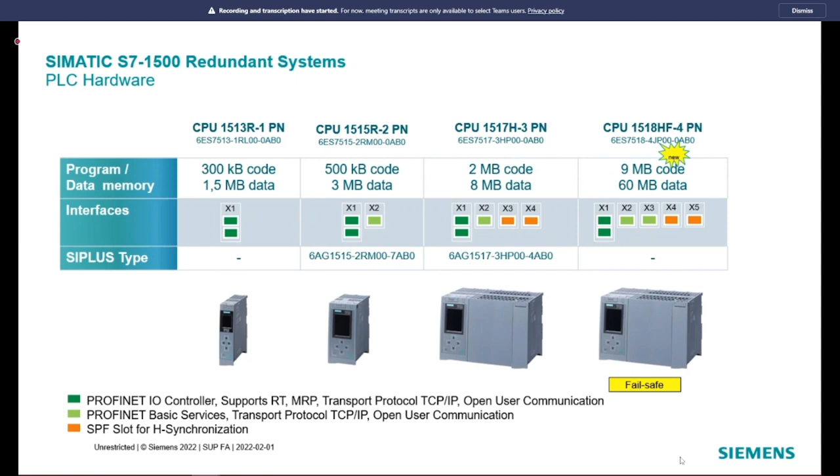So as many times we have already mentioned, this is the new CPU with the failsafe system. Previously, until version 16, there was no safety system available for 1500 R/H, but from 17 onwards with the 1518 HF CPU, we can have the failsafe system, and the memories are 9 MB code memory and 60 MB.

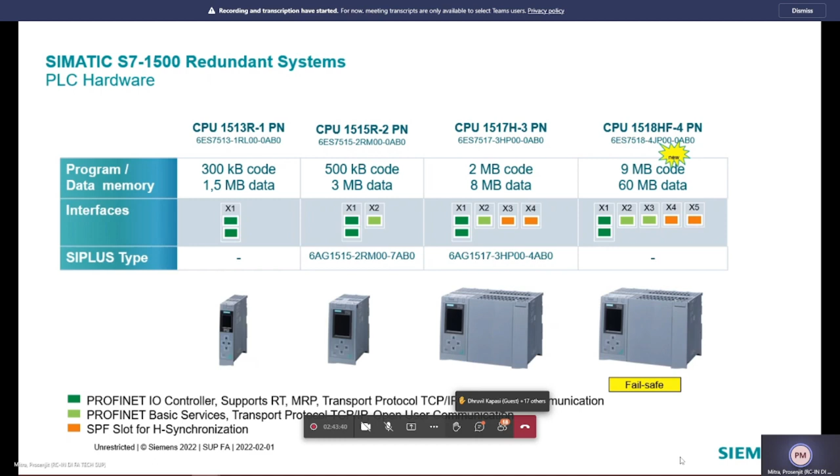Now coming to the system redundancy and the different network configurations. This is very important because during the checking of your configuration, you can keep all these things in mind, and this will help you to configure the final architecture.

So just to show you, ET 200SP and MP are there by default, but as you know, there are different shortages of material going on. You can also try with maybe ET 200eco PN, because this is also supported from firmware 1.1. And there are PN couplers which support S2 devices. These are basically the list of S2 devices supported with 1500 R and H. Apart from that, ET 200SP HA is also supported. I will show you in more depth what can be done with SP HA in the upcoming slides.

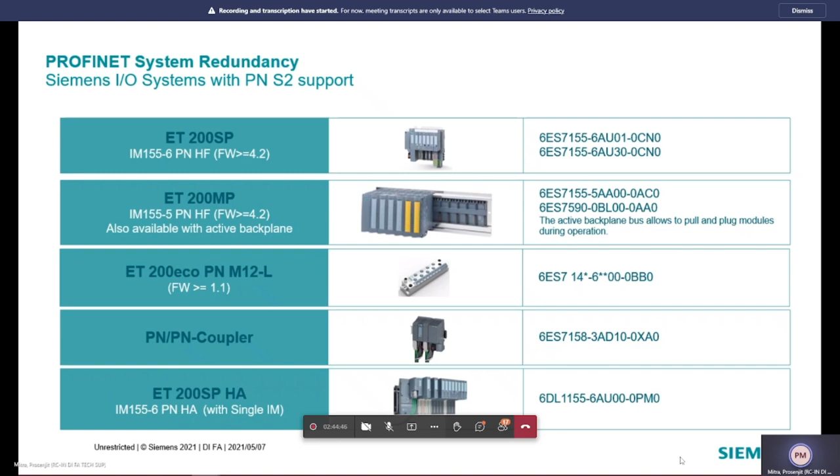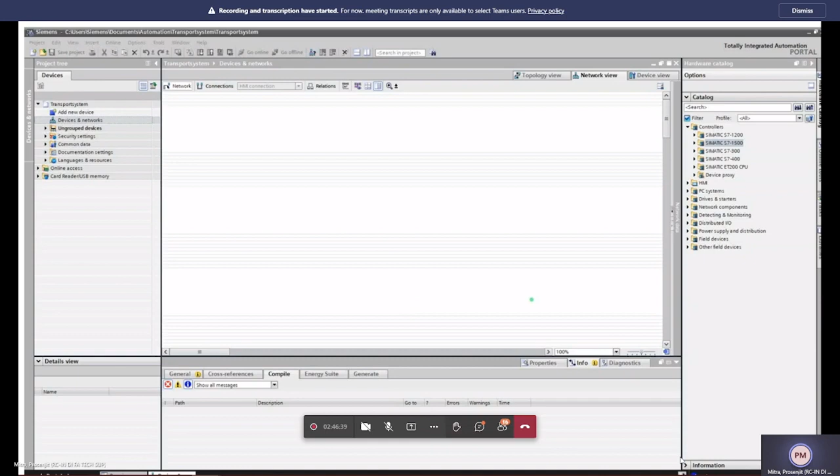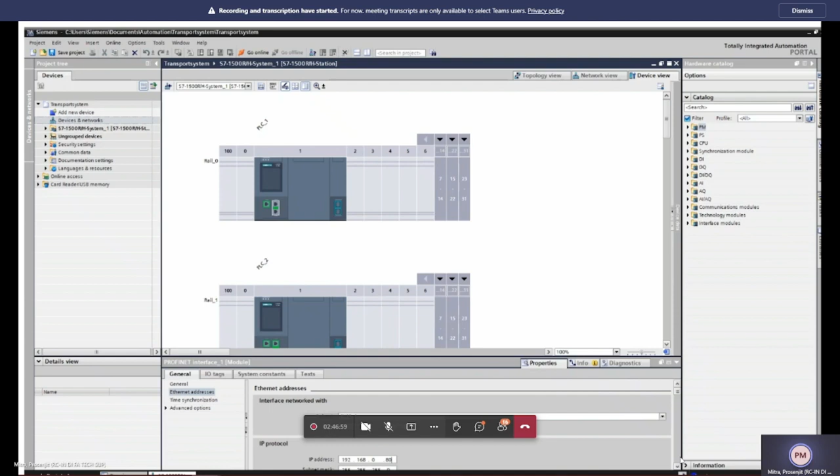So once you select the CPU, you can drag and drop into the network view area, and then you can see in the device view both the CPUs appear directly. So you don't need to individually select a CPU. Once you select R/H, R or H, any of these, it will come with two CPUs, and you can just select the IP of the individual CPUs.

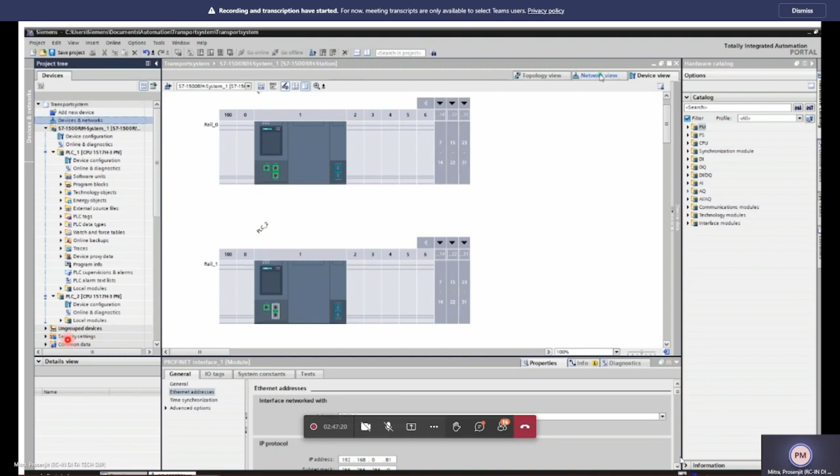And once you go inside the program, you can see here that programs can only be written in the first CPU, and the second CPU will have no programming options. So once you have done it, you can directly detect all the Profinet devices which are connected. If all the devices are connected with the hardware, you can detect it, or else you can configure it like the normal configuration that we do.

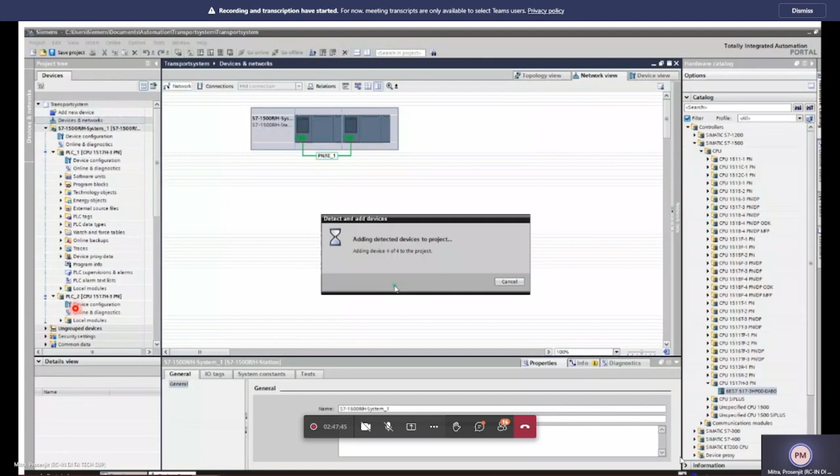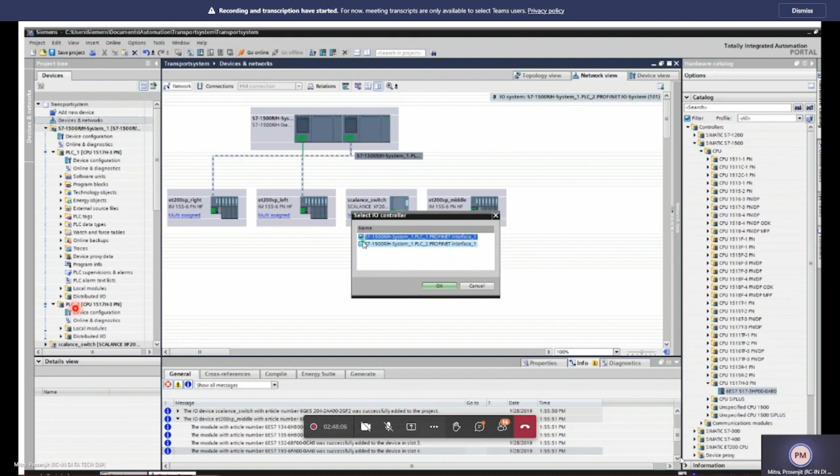So once you detect all the different hardware which is required, you can just select it and all the devices will appear. And individually connecting the devices is very easy. You can drag and drop to each and every CPU, and you will see here there is a multi-assign appearing here. Another option is selecting directly, double clicking and selecting those particular CPUs. You will get a multi-assignment also, or individually drag and drop. So both the options are there, and you can see all the CPUs are appearing here.

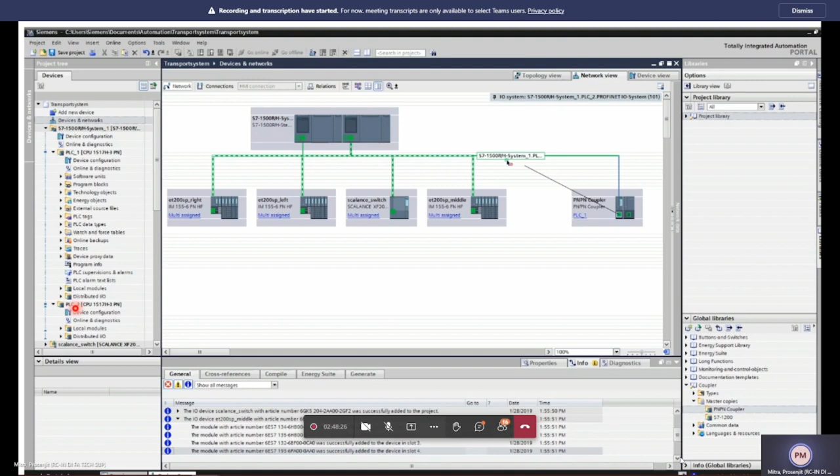And now if I want to connect another CPU which does not have S2 connectivity, or a 1200 CPU, then I can use a PN/PN coupler, and one side of the PN/PN coupler can be assigned to the 1500H CPU, and the other side can be connected to the S7-1200 CPU. So in this way, once it is done, you can see the IP addresses are appearing in the system.

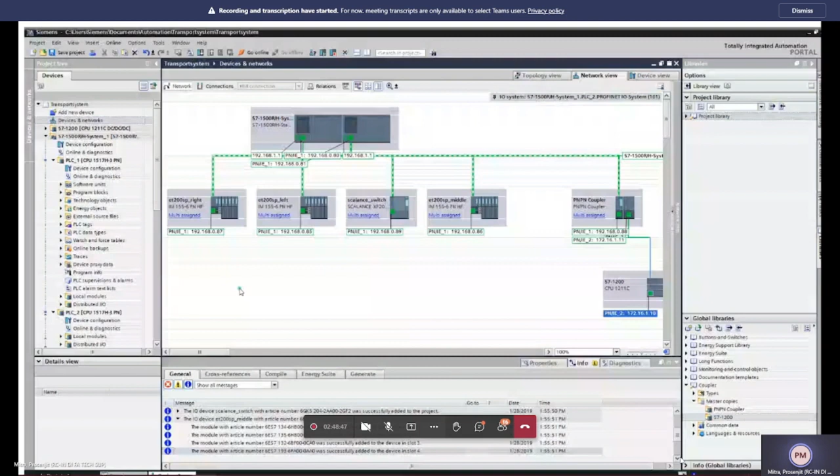So this was a simple configuration, how we can do the configuration of S7-1500 R/H. So what are the different Profinet devices, how you can put those Profinet devices, and what are the effects? So now if there are two devices, one is S2, one is S1 device. If it is an S2 device, then it can be directly put into the ring and it will have a bumpless switchover, because S2 devices support connectivity to both CPUs at the same time. So whenever there is a changeover from primary to backup, there is no effect on the IOs because it has a bumpless switchover.

But if it is an S1 device, you can put it in the ring in case of H, but it will not be bumpless, because the S1 device does not support that part. So it will restart and check for the new available master in the network, and only then will it connect to that, and that will create a bump in the system. And there is another option that you can have a PN/PN coupler, and with that you can have a subordinate controller, and this controller can be connected to the 1500 R/H. So this is for the S1 devices. So you can connect the S1 device with the controller.

For example, G120 drives do not support S2 redundancy, but the S120 drive supports S2 redundancy. So if it is an S2 S120 drive, I can put it directly on the ring and it will support bumpless connectivity. But if it is an S1 G120 drive and I want a changeover which should not affect the process, then I can have a subordinate controller and put it with a PN/PN coupler, and the drive logic can be written in the PLC and it will work.

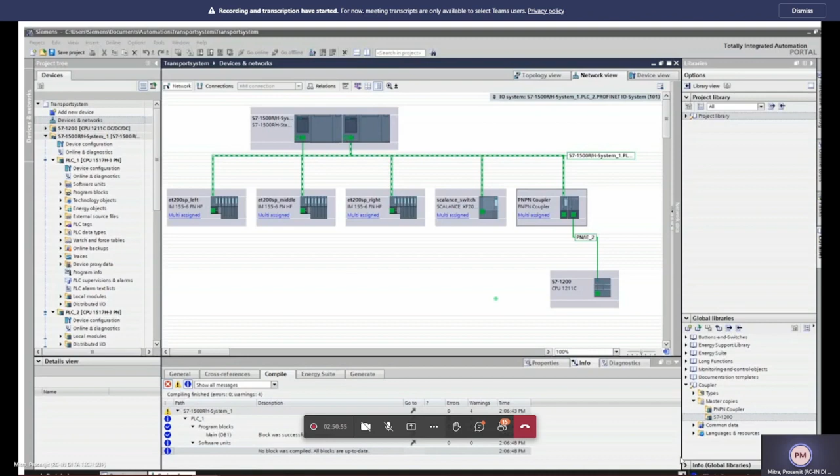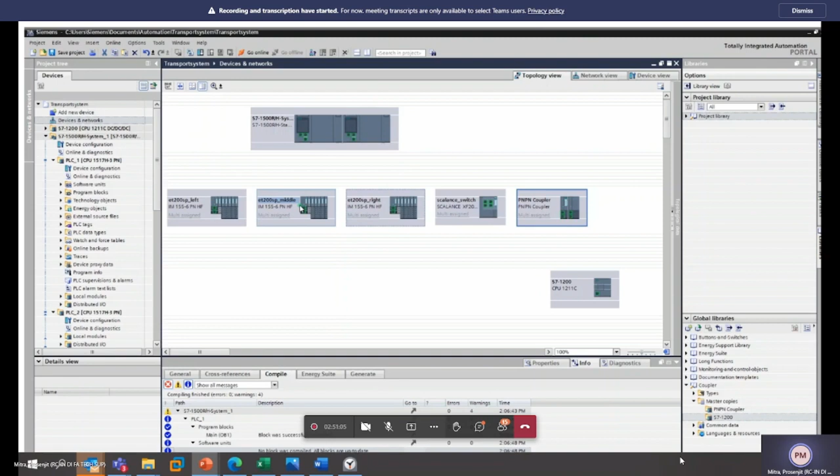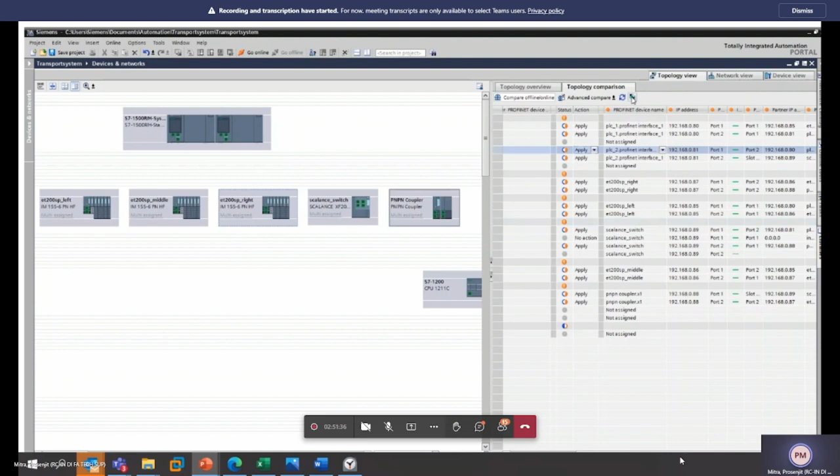So once this network configuration is done, we have to go to the topology view and define the topology. This topology can be defined by hand, or there is an option to directly upload the configuration. There is an option called compare, and you can select your Ethernet adapter. Once the Ethernet adapter is selected, on the right hand side you can see that there are some changes. So you can just apply to all and then synchronize. Once you synchronize, all the different configurations appear here.

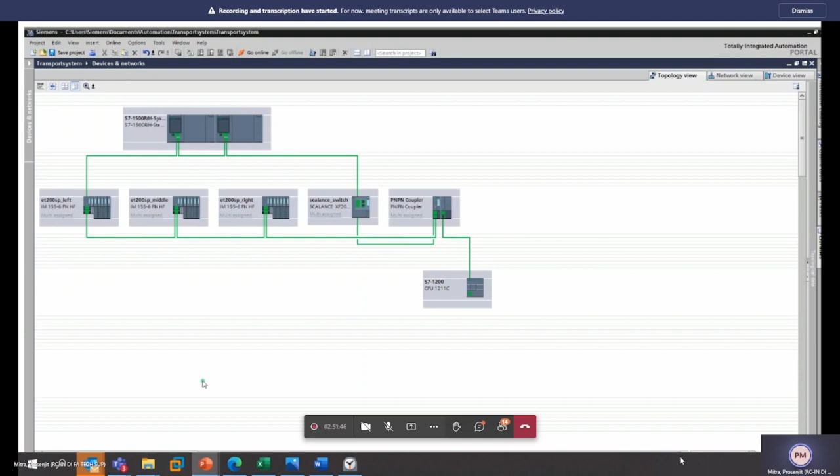So no need to individually create, because sometimes if the cables are wrongly configured, then it will give you an error. So if you already connected the devices, you can directly import the configuration in the topology view also. But once it is done, then we have to define. By default the manager for 1500 R and H is configured, and it is configured as auto because here two CPUs are basically managers, so it is auto manager.

But for the different devices, you have to configure it as client which are in the ring. And for all the devices, the same rule goes on. So for each and every device, we have to define the client, whether it is working as a client in the ring or not. And another part is the watchdog time. Normally this watchdog time, as per Profinet, should be kept as 112, and it will give a watchdog time of 224, and this is common for all.

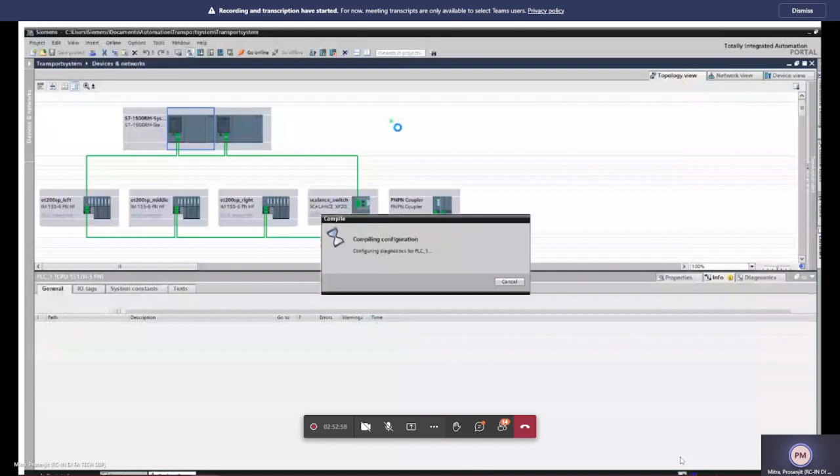So once all these selections for each and every device are done, you may say, okay, if I have 50 devices, is it relevant to go and change every device? Okay, there is also a way out. We will see it at the end. There are some add-ons also where you can see how we can avoid those parts and use some other different things.

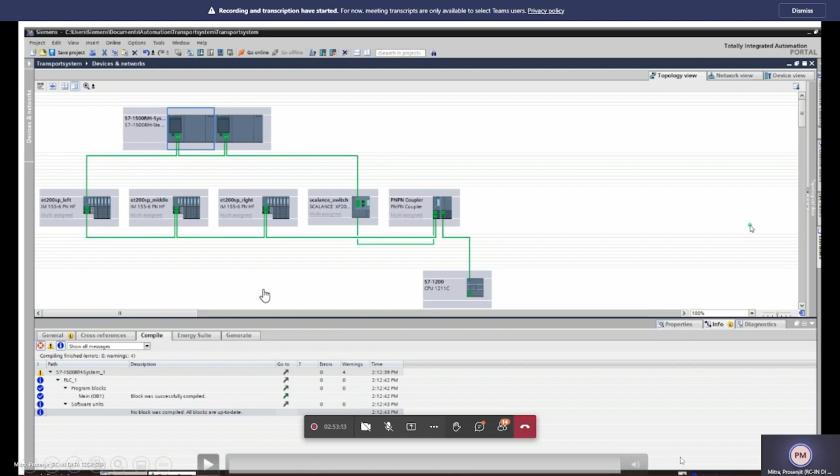So now connecting different controllers in the ring or outside the ring, or how we can communicate between the controllers. There are different options. You can see three options are available here. One is basically selecting the controller as an I-device. The communication can happen with the two CPUs, but communication is interrupted whenever there is a changeover between the two CPUs.

Another option, if you want bumpless communication between the H system or R system and another controller, then you can use a PN/PN coupler and this switchover will be bumpless. And if you want to connect Profibus devices, because 1500 R and H both do not support direct Profibus connectivity, you can have a standalone PLC connecting the Profibus devices, and then it can communicate to the devices. For this communication also, the PN/PN coupler is the best solution. Or else you can use it as an I-device, and another can be open user communication. So by writing open user communication blocks, you can connect to the CPUs.

Now, in case of 1500 R and H, there is a possibility to have a different IP as a system IP and a device IP. So what is the concept of system IP? It is very important because it's a feature additionally given with 1500 R and H. In both the CPUs, during configuration, you have seen that we have given this CPU one IP and this CPU another IP. But to communicate with an HMI or some PLC, if I want a single IP, then I can enable the system IP of the PLC with a single click, and this system IP is a single IP common for both the PLCs.

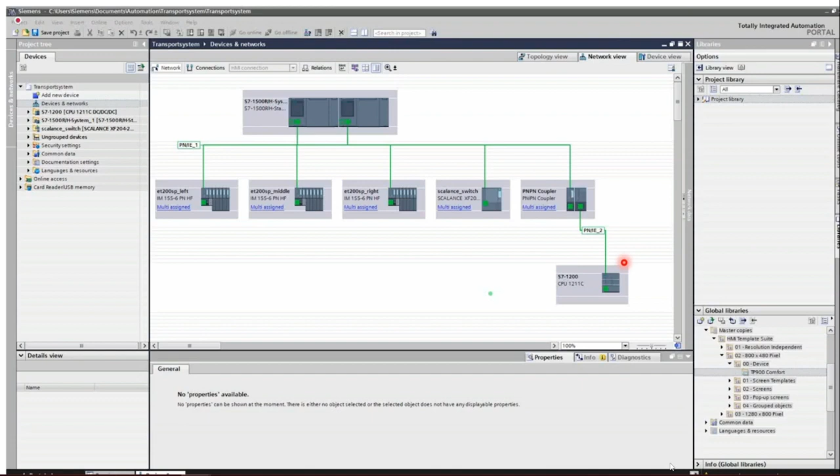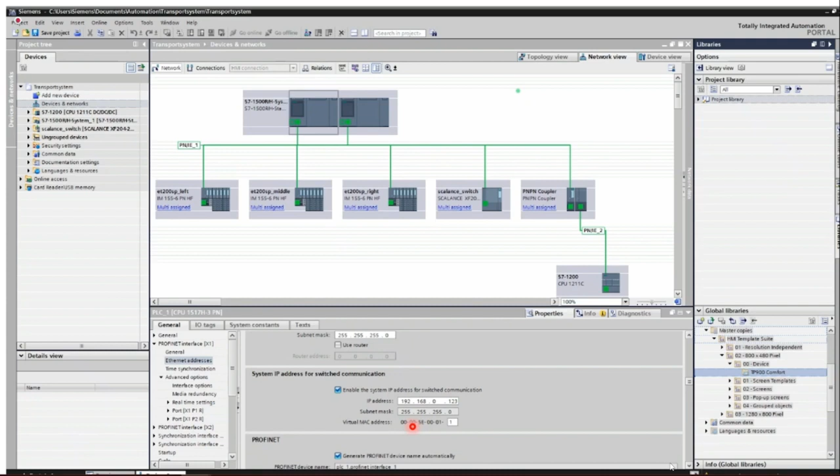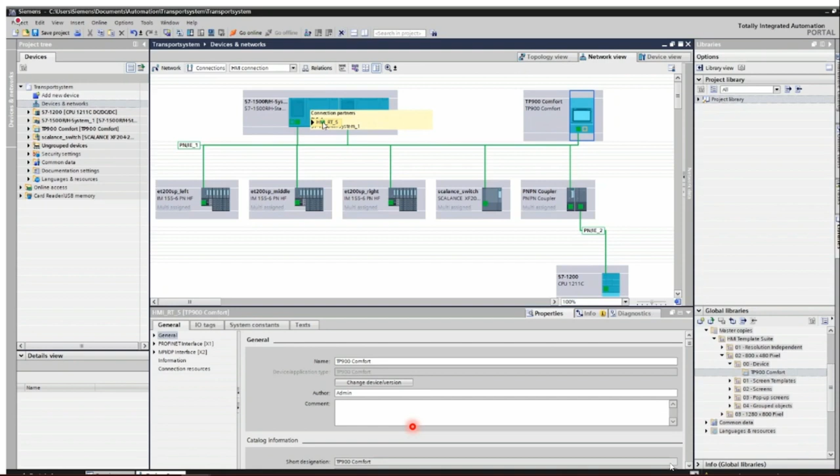So how to configure it? Just go to the CPU properties, and under Ethernet address, there is an option called system IP. It is not enabled by default, so you have to enable it. Once you enable it, you will get a separate IP, and there is a separate MAC address also. Here you can see, now I am putting a Comfort HMI in my network and connecting it to the PLC. Once I do the connectivity, I don't need to check because I am using the system IP of the device.

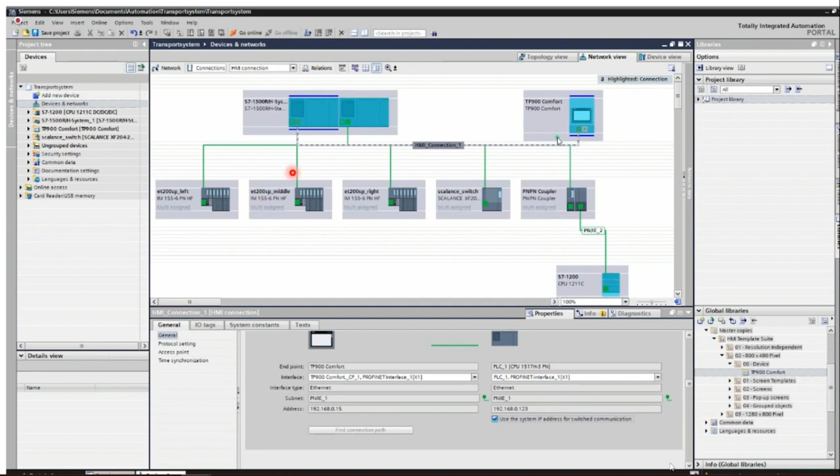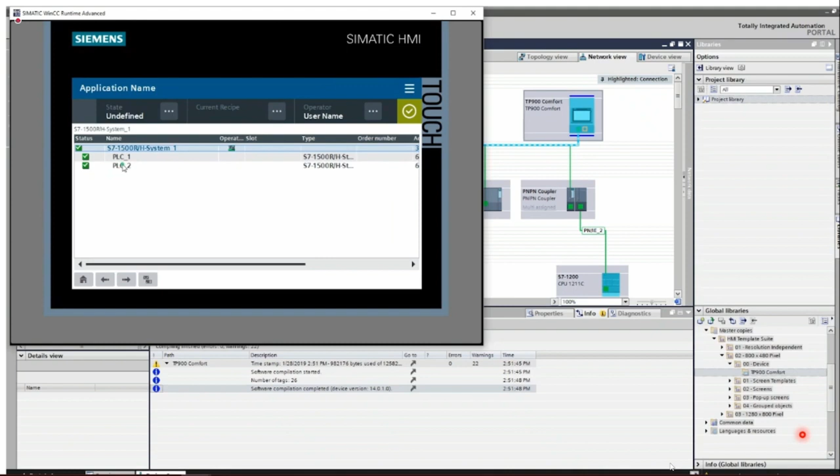So the connections will be made under one IP only. I don't need two IPs, I don't need a script, I don't need any other IP. I can directly connect with the system IP itself. Enabling that will give you the system IP configuration. That is why in case of 1500 R and H, you can also connect basic panels. You can see the connectivity is made, and you can see the diagnostics inside the PLC and other parts. Everything is possible.

So this is the behavior. Once I have configured it, and a PLC is communicating with the primary, and there is a failure in the primary CPU and a changeover happens to the backup, and the backup is now primary, then the HMI is still communicating to this device, as there is no droppage because of the system IP.

So you don't have to check, sorry for that part.

Another possibility of connecting is the device IP, and in this case a device IP is basically the individual IPs to be configured. Whenever we are using a device IP, the synchronization time becomes more because communication happens between primary and the other PLC: the data is requested, data is received, and the third part is basically the data synchronization.

But in case we are using a device IP via sync, what happens is data is forwarded. First, data is requested, then the job is synchronized, then data is received, and then data is synchronized. So the data synchronization happens after two steps, so it will increase the synchronization load in the system.

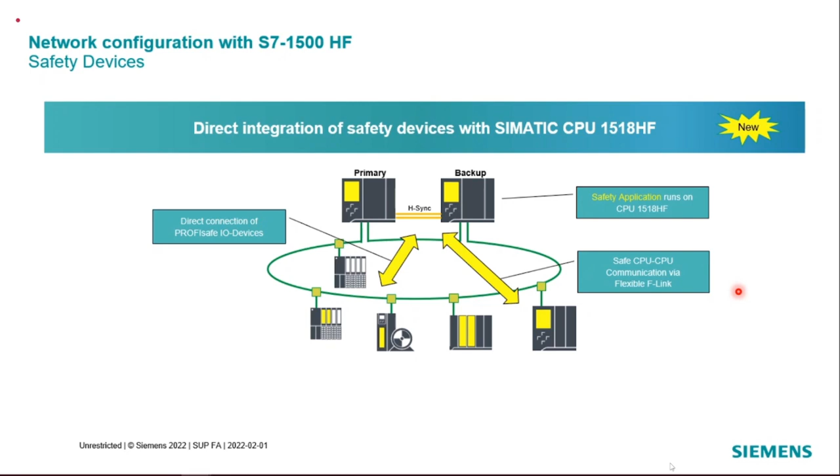Safety for redundant system. Now, because we have this 1518 HF CPU, we can directly connect safety devices in the MRP ring, and using these PROFIsafe IO devices, safety applications running in the main CPU and controlling the system can be done directly. So no need of a separate PLC in this case.

But it may happen that my application is very small and I don't want a 1518 HF CPU, but for a smaller section of the safety part, I can have a separate CPU. That separate CPU can be in the ring, and the safety program can be written in the safety PLC with the safety IOs and controls, and the safe communication of the F controllers can be done via iDevice or open user communication.

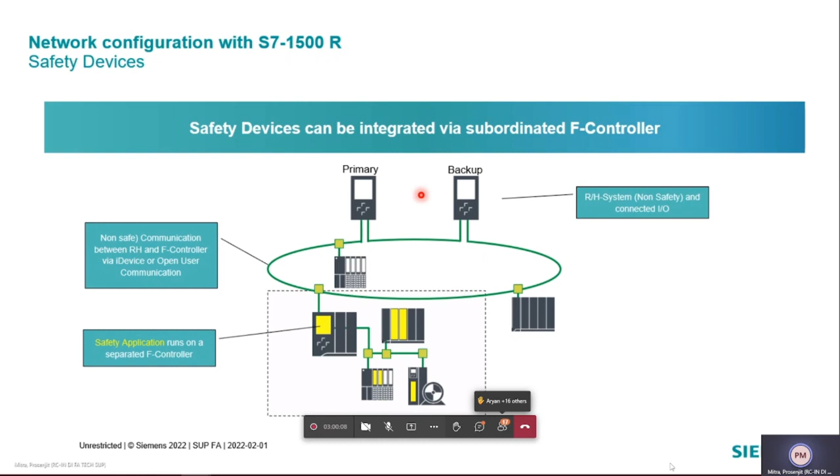Here, no safety program will be written. All the safety program will be written in this part. So this is another option. Another option can be one which has more availability. In the previous case, the communication is either via iDevice or via open user communication, so it is not a bumpless communication.

But if the customer wants bumpless communication between the two CPUs and also higher availability, then we can have a single PN/PN coupler and connect the safety devices with a safety controller. That will also work. Another option, which is optional, not mandatory, is if the customer wants higher availability, we can have two PN/PN couplers and make a ring in between, which will have more availability.

HMI connections, you have already seen this part in the demo. HMI can be connected via system IP also. That is why basic, comfort, all the different types of panels can be connected to 1500 R/H. I can connect via the X1 port, and I can connect via the X2 port also in case of 1515R or 1517 and 1518H CPUs.

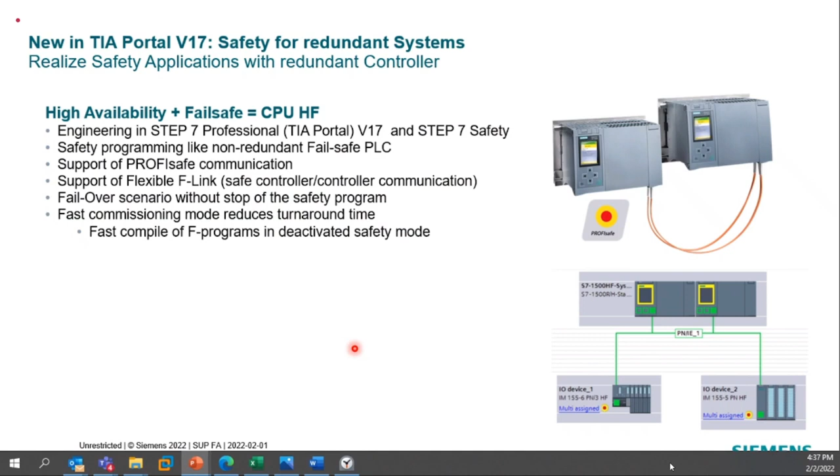So these were some of the do's and don'ts, and there are some more. Apart from that, there are some new features from version 17. Some we have already seen, so I'll not highlight those, but some are very useful. First is the safety CPU. I have already mentioned it many times, so I'll not go into detail. The 1518 failsafe and high availability CPU is already there, and you have seen the configuration examples with the safety program running, and communication with another safety PLC can also be done over the X2 port.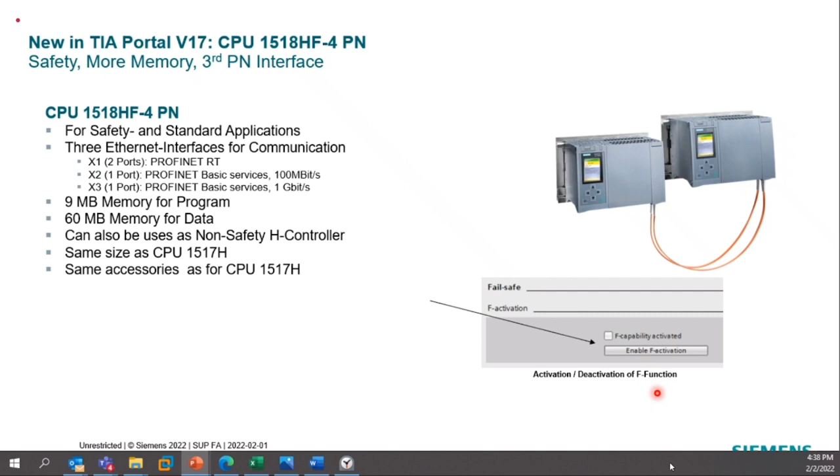And if you want to use the safety functions, then you have to activate this part. But in some cases nowadays there is a requirement that I want two communication ports separately, and the IO ring will be separate. Then in that case you can also use the 1518 HF CPU without using the safety part, and you don't enable the F part, and you can use it as a normal redundant CPU, not the safety.

Very important part now is the MRP interconnect. As already mentioned, this is a limitation of MRP that we can have maximum 50 devices in the ring. But if I want to have multiple rings, then what to do? If I am not having a CP card and I want to have multiple rings, then what to do? So then the option is MRP interconnect.

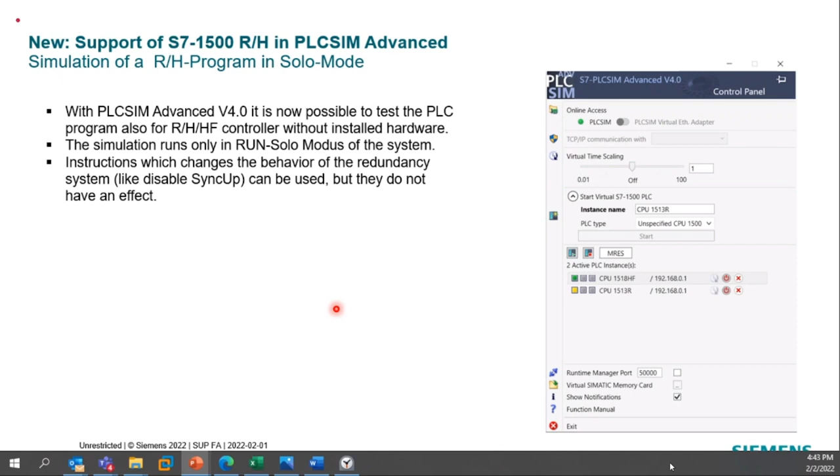Next part, PLCSIM Advanced. You have already seen in our previous slide that with version 17 and PLCSIM 4.0, all the different H CPUs and R CPUs are supported by selecting from the drop-down.

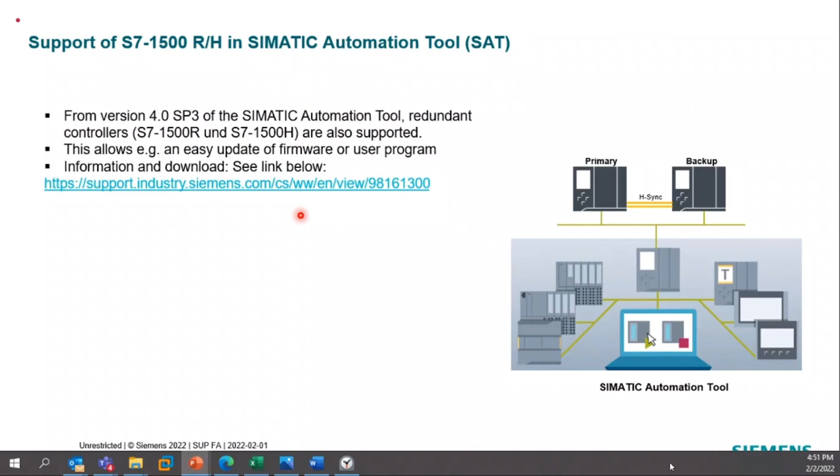The first part is the new SIMATIC Automation Tool. From version 4.0 SP3 of the SIMATIC Automation Tool, redundant controllers are also supported, and this allows you to update the firmware or user program directly using the tool. This tool is very helpful if the machine is sent from one country or state to another, and you only want to download the new modifications. So without having TIA Portal, you can use the SIMATIC Automation Tool to download or upgrade the firmware. This information is available in the given SIOS link.

Now the interesting part is the remote redundant IO. This question comes many times, whether we can use redundant IO in 1500 R/H or not. Yes, we can use redundant IOs, but not by hardware configuration. These are basically blocks you can configure for redundant IOs, and it is not only in two IMs. It can be in a single module, side by side modules, or in two different racks, because you can configure it in TIA with the LRedundantIO block.

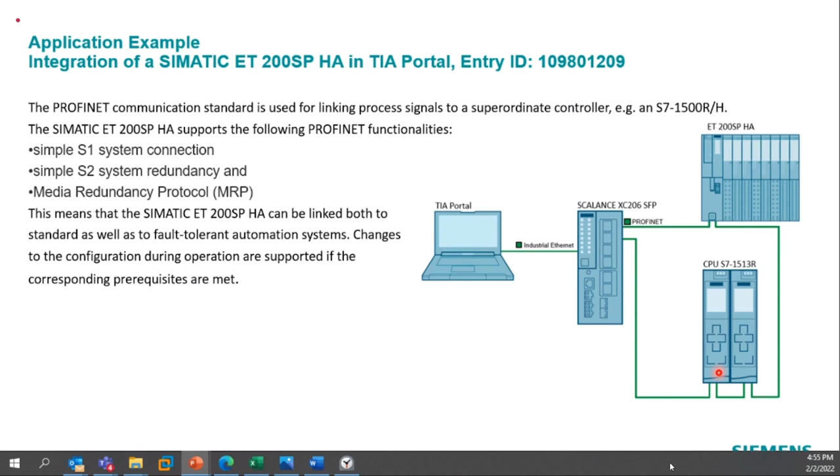Still now, with the release of version 17, redundant IMs, meaning 2 IMs in a single rack, is not possible. It is awaited maybe in the next version; we cannot confirm at this moment, but it is going to come. But with ET 200SP HA also, you cannot use it as R1. It can be used as an S2 device, and you can configure it with MRP media redundancy connectivity and use it.

Next is the portion that you have seen during the configuration of IMs or the IO devices. We were selecting individual watchdog times and changing them. So you may say that okay, this is very hectic. I have a big system and changing each and every one is a little bit hard.

So this has an application example already in our support site. You can directly go to that application example and download the add-on. Like in case of Pankaj, he has already shown you for VCI there is an option of add-on for connecting VCI. So you can download and add it as an add-on.

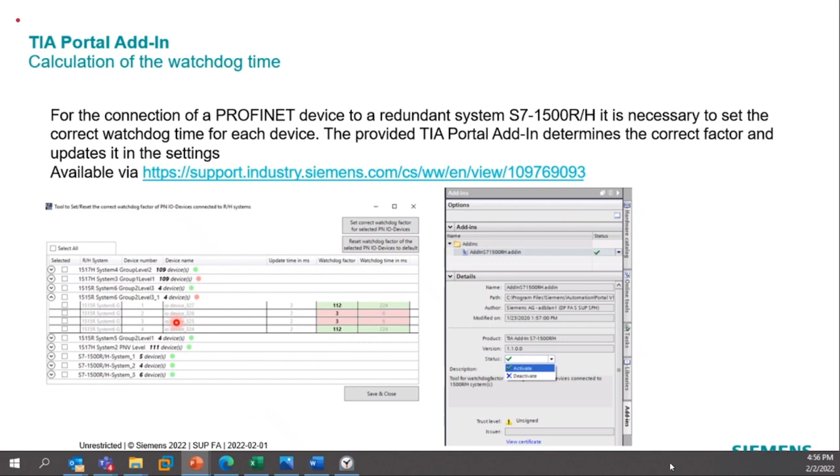Similar to that, you can have an add-on in the S7-1500 TIA Portal for 1500 R/H, and this add-on will help you to do multiple configuration of watchdog times in a single window. So you don't need to go to individual modules and do the change.

Long awaited, this was already there from version 16, but for different applications like water, wastewater, and where communications are required, metro and other applications where there is a requirement of IEC 60870-5-101/104 and DNP3. All these things now can be used with TIM 1531 IRC, and configuration-wise it is also given how you can use it, because the main configuration will be in TIM 1531 IRC.

Then the SIPLUS RIC library, which is basically 60870-5 of all the versions, that is 101, 102, 103 and 104, mostly in substation automation and other parts. So you can use this library also with 1500 R/H. Then 61850 for relays. We can use this communication as a client library, 61850 as MMS. This can also be used from version 16.

This is for the Modbus TCP redundant library. So this is also possible with S7-1200 and 1500 and also 1500 R/H. So if there is a Modbus TCP redundant communication and you want to use that block, this goes for a cost, because this is a licensed one, and you can add this